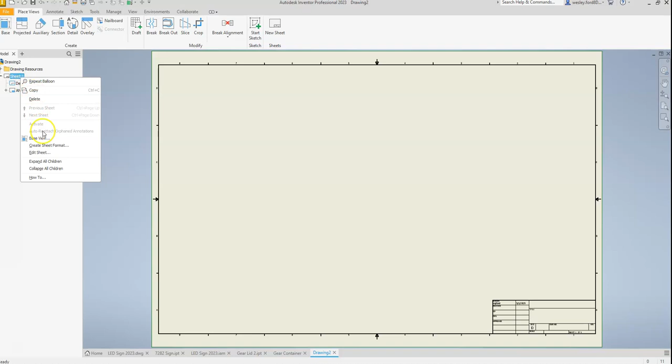Create a new drawing file, hit create. We're going to make sure that the sheet size is B in this case. Once I've changed the sheet size, I'm going to place in my assembly view.

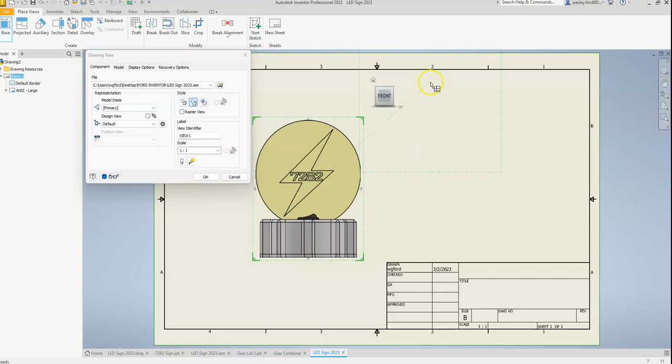I want two different views: the front view and an isometric view. I'll move the front view here and the isometric view over here somewhere. I might need to make the isometric view smaller.

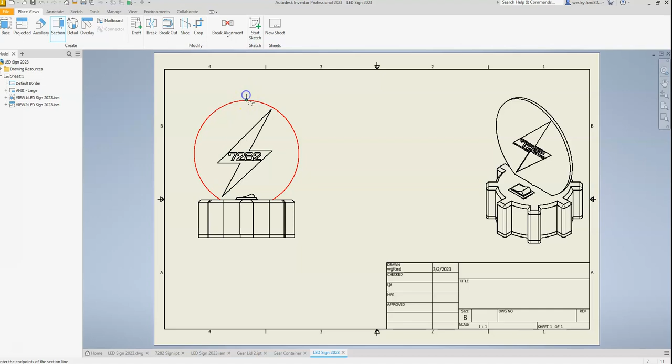The next thing we're going to do is a section view. So I'm going to use that section view tool, select my front view, and generate a section view wherever it's appropriate on your design to try to get most of your parts.

So you can see my section view that I've created. I have the switch here, there's my LED, I can see my sign, there's the battery, here's my lid. I'm getting most of the parts. Your design might be a bit different, but most of ours are going to be vertical, up and down.

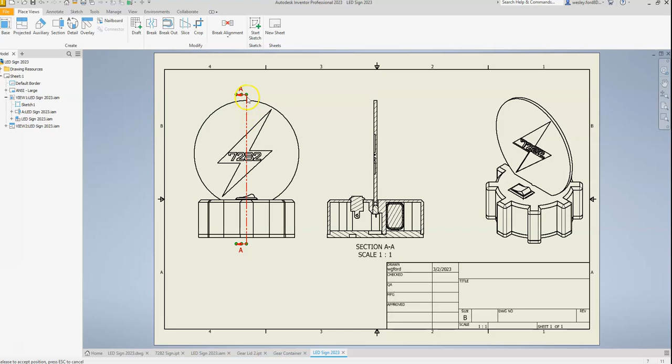Once I've done that, I'm going to hide our cutting plane. Now how we do this, I right click and there's an option called show entire line. I'm going to unclick that so I can see more of my work here.

Alright, one of the next steps is to place in our sign artwork. If you extruded it like I did, I've extruded my logo here into my sign, it's going to appear automatically. But if you just did 2D sketches and your work's not showing up here, what you'll need to do is go to your assembly in your model browser and open it up.

Find your sign part, open that up, and then once we've done that, we're going to right click the part and hit Get Model Sketches. Once we have that, your sketches should appear. We also might need to toggle the visibility.

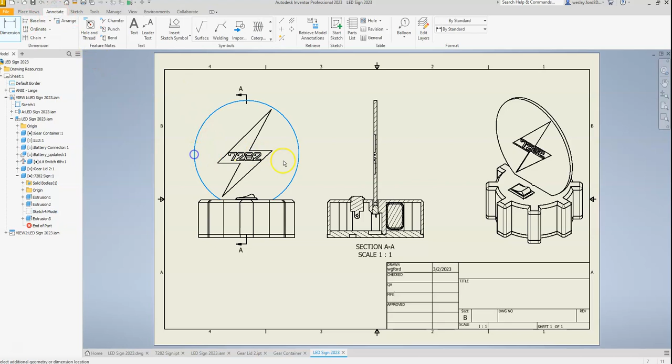Alright, the next thing that we're going to do is annotate overall dimensions. So we're going to have overall width, overall height, and overall depth. Do your best to line them up and make them look good.

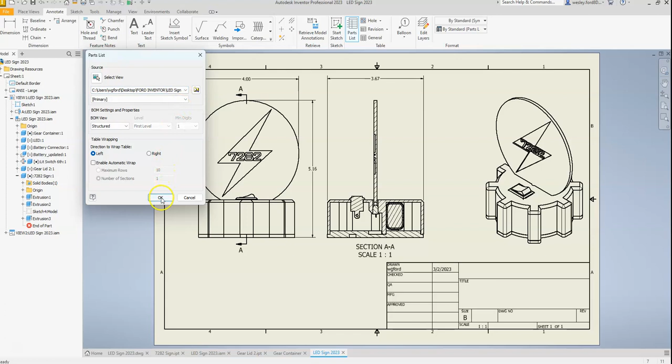Our next thing, we're going to have a table indicating all the parts. So this table, if we're under annotate, we're going to see parts list. We're going to select that. It's going to ask us to select our file, so we want our assembly. We're going to hit OK, and we're just going to place it bottom left here.

From here we're going to double click it and modify this table a little bit. On the top left hand side is a column chooser. This is where we can add different properties and take away different properties from this table. On the right hand side, here's the properties that have been selected.

I don't want descriptions, so I select it and hit remove. We do want item number, quantity, and part number. From here, let's scroll down. We're going to find volume and add that, and we're going to find material and add that. From here, we'll hit OK.

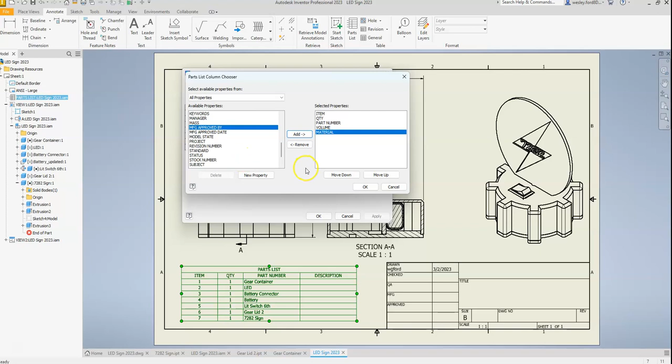And the table here, the material - if you've applied the material to the part, it will update there. If you haven't, it's just going to say generic. Now, what we're going to do is find all of our 3D printed parts, which are going to be the container and lid. We're going to double click and edit that material, and we're going to call it PLA plastic.

The other parts where it says generic, like the LED, we know this is a plastic part. Battery connector, we know it's a plastic part. And the battery, we're just going to say it's plastic. Light switch, same thing, just going to call it plastic.

Now the sign itself, we know we are using an acrylic, so acrylic, we'll say plastic. We'll hit apply, and you'll see that our table updated here. From here, this is everything we need to add.

So let's hit OK. From here, I can grab the table and move it, place it where I want to. We want it somewhere in this bottom left-hand corner.

The next thing we're going to do, since we have a parts list, we're going to balloon our parts so people know which part is which. So to do that, we're going to click on the Annotate ribbon and then the Balloon tool.

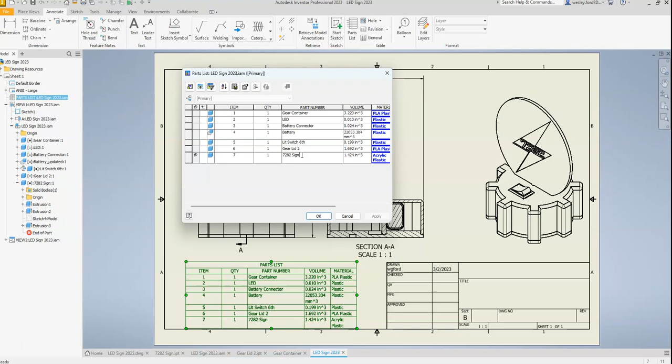balloon item 7. So if we look at 7, this is my sign. And this part number here is going to be whatever you've named your part file. So if your part file names don't make sense, what you'll want to do is double-click this table and name them so that they make sense. So you might call this like acrylic sign or art sign, whatever. Make sure people understand what it might be.

From here, we're going to balloon everything as best as we can. We want to try to not put these balloons on our object. And if you can elbow them, great. If not, they look fine just like this.

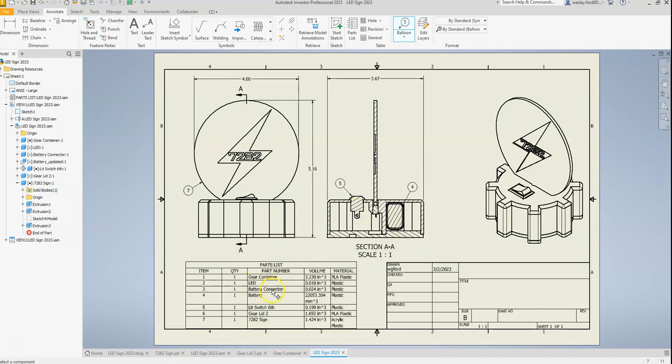Now, what about the parts that don't show up in that view? Like my battery connector, it's on the other side of my battery here. What I'm going to do is balloon the battery or an object close to where that part is.

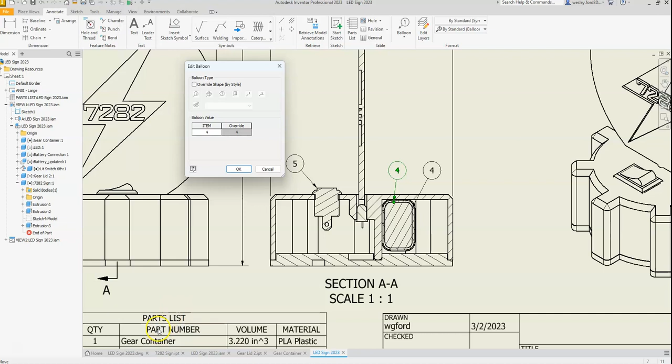Once I've done that, if I double-click that balloon, it's going to give me an override option. This is where I have to look at the parts list. My battery connector is item 3, so when I double-click here to override, I'm going to call it 3. It will update, and that lets the viewer know, hey, the battery connector is somewhere over here.

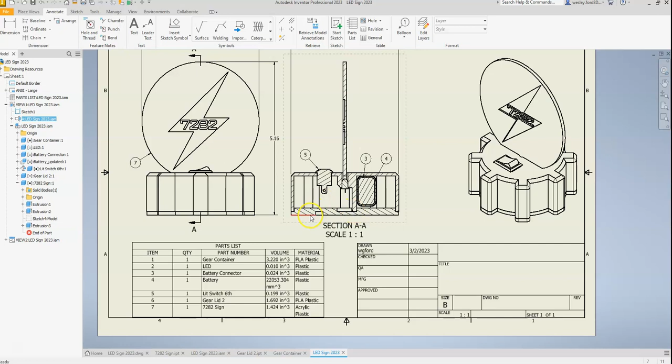Go ahead and balloon everything. Once you've ballooned all of it, here's some other things that we're going to do. Make sure your scale fills up this entire page as best you can, kind of like what mine is right now, if you haven't done so already.

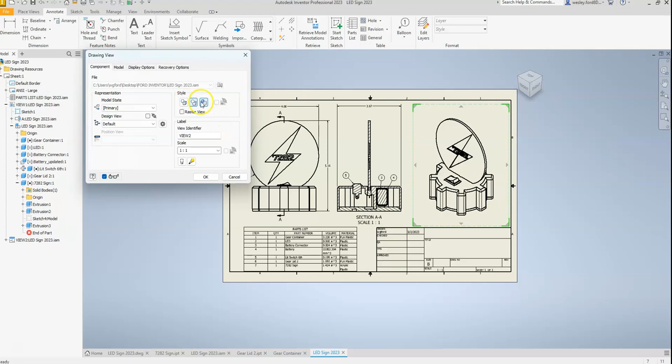The next thing, we want your object to be full color. So to do that, we're going to double click that view. We're going to go in here and we're going to select the shaded option.

Now color wise, your sign and your container and your switch and all your other components should use somewhat realistic colors. Now the sign, here's what I've done.

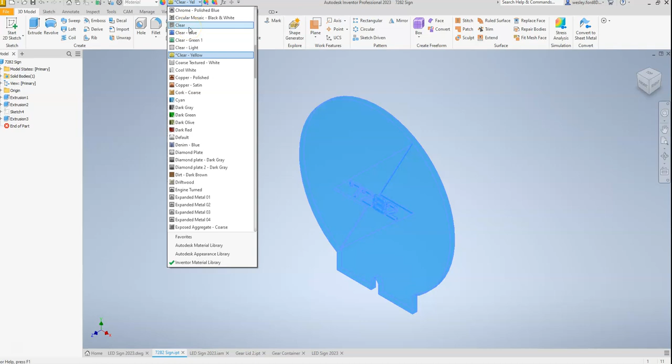Part-wise, I've used a clear material. In this case, I use clear yellow. I think yellow looks the best. You can use any other ones here if you want. Some of these do not look good on the drawing and won't print well. The clear yellow will do pretty good.

You can also change the color appearance. Try not to get really funky with it. We want it to look professional. Your base, I used the lighter like gray. Your switch, I just used the black color. And if you have any other visible parts, you really shouldn't, but those are the colors that I went with.

Next thing you're going to do, you're going to want to put your name on this. So that very top column, we're going to put LED sign project, put your first and last name, and then your class period. Underneath, we're going to have assembled LED sign. Make these as big as you can. From here, we're going to print this out.